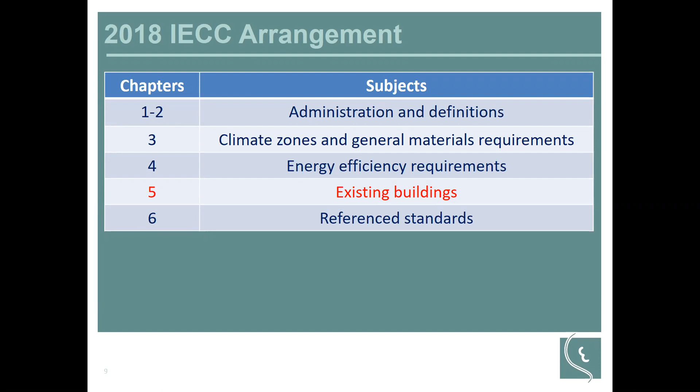Well, thank you, Robert. As Robert said, today we're predominantly going to cover Chapter 5 of the IECC. Now there are several references back to predominantly Chapter 4 in Chapter 5, and a lot of that is rather than reiterating all the levels for different aspects of a building, it just refers back to the new construction section where appropriate.

So under Chapter 5, there's 6 different subparts. Predominantly what we're going to focus on is existing buildings, as well as maintenance, and some new and replacement additions and alterations. So as far as the scope of Chapter 5, here we're looking at alteration, additions, and change of occupancy of existing buildings and structures.

One question that will come up frequently is, well, is there a certain threshold where a repair becomes an alteration? There really is not any particular threshold for that, with the exception of lighting. Lighting has a specific percentage that then has to switch from this is just a repair to an actual alteration for code compliance.

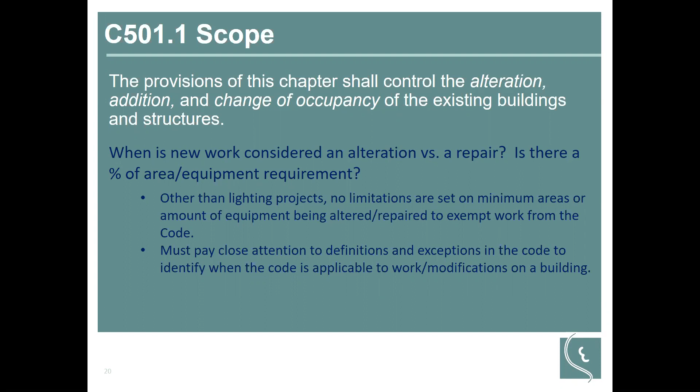So as far as existing buildings, the code is fairly nice in that it grandfathers most things in, and so it doesn't require alteration and changing of existing buildings, as long as they are not being altered, changed, or added onto. So you can continue to use the existing buildings as they are, without having to bring them up to the current IECC standards.

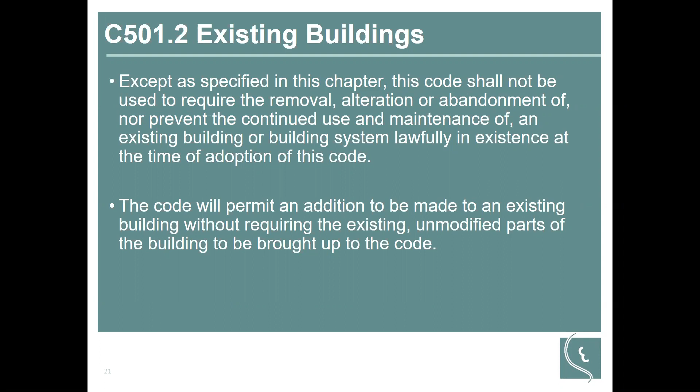This is particularly useful where it notes the code permitting additions and alterations without requiring the existing unmodified parts to be brought up to the code. So one good example of this is if you're doing roof replacement, that doesn't require you to touch and modify the HVAC equipment that may be on that roof in order to bring the roof up to code compliance.

As far as new and replacement materials, obviously the code encourages current building practices and materials to be used. They do also note that where you have restoration going on, you're likely to run into materials that may be hazardous, such as asbestos and lead paint, and these cannot be used because they can create hazards to life, health, and property. So that's very important.

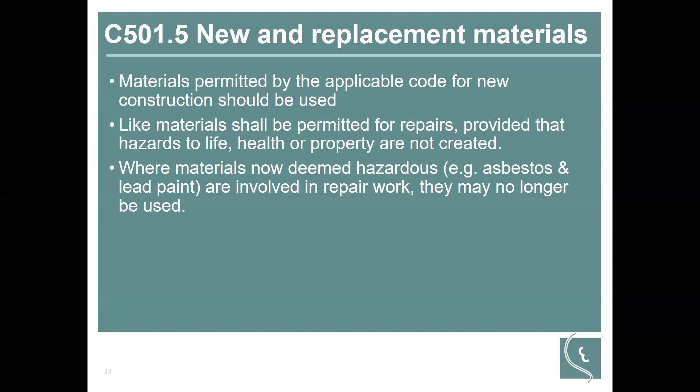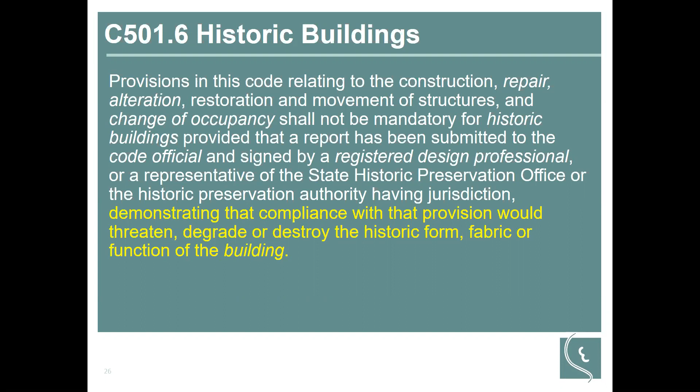So have Robert talk a little bit more here regarding additions to buildings. Thank you, Ryan.

So let's talk about the definition right out of the code first for addition. It's an extension or increase in the conditioned space, floor area, number of stories, or height of a building or structure. So I think the key words are conditioned space, increase in conditioned space.

So as Ryan mentioned earlier, additions to an existing building system or portion thereof shall conform to the code as it relates to new construction. So basically it's anything you would do for a new building without requiring the unaltered portion of the existing building or building system to comply. So that just reinforces what Ryan was just talking about.

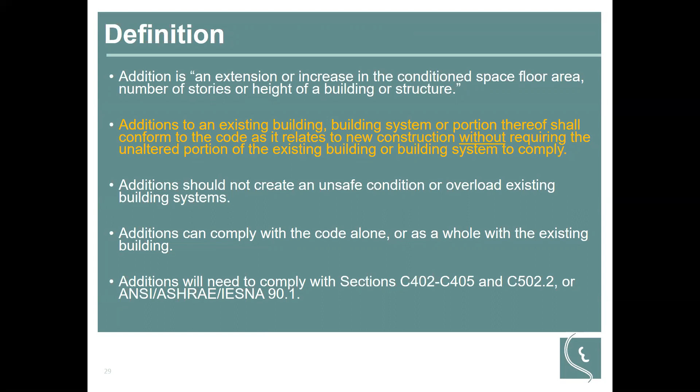So section C502, additions - any non-conditioned space that is altered to become conditioned space shall be required to be brought into full compliance with the code. Here you can see it looks like the interior of a warehouse.

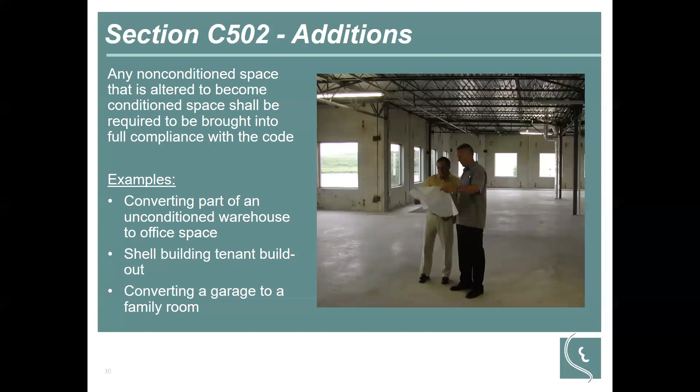It's being modified or finished out. So examples: converting part of an unconditioned warehouse to office space, which is not unusual, or shell building tenant build-outs, that's very common, or converting a garage to a family room. Those would all be considered additions because you're increasing the conditioned space.

So when we're talking about vertical fenestration and additions, C502.2.1 - basically I'm reviewing what you have to do if you're designing a new building. For vertical fenestration areas less than 30% of gross above grade wall area, you have to comply with the 3 bullet points below that.

Section C402.1.5, which is a component performance alternative. The next one, 402.4.3, which is prescriptive, the maximum U factor and solar heat gain coefficient specified in table C402.4, or the total building performance, section C407. So there's 3 different compliance paths.

If you have greater than 30% of gross above grade wall area, you've got to comply with C402.4.1.1, increased vertical fenestration with daylight response controls - meaning you've got so much daylight probably coming in that code's going to require you to put daylight response controls so that your lighting can respond to all the daylight coming in through your windows.

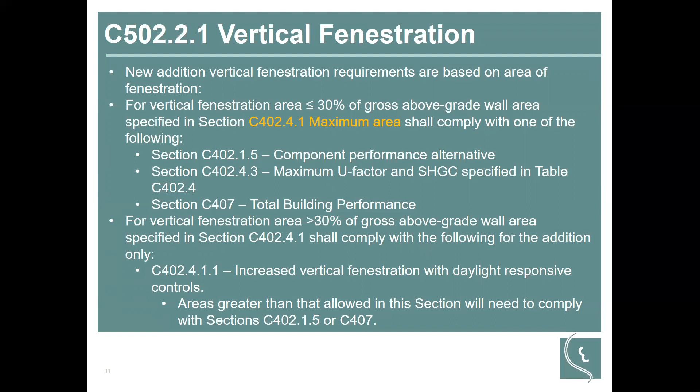Skylight areas, the maximum amount of area - C402.4.1 prescribes for both fenestration and skylights how much surface area you can have, and maximum area of skylights shall be no greater than 3% of the gross roof area.

And you have to comply with the component performance alternative or the total building performance paths. If you are going beyond the 3%, you have to comply with C402.4.1.2, which requires you to install daylight responsive controls - basically the same thing as if you're going with fenestration over 30%.

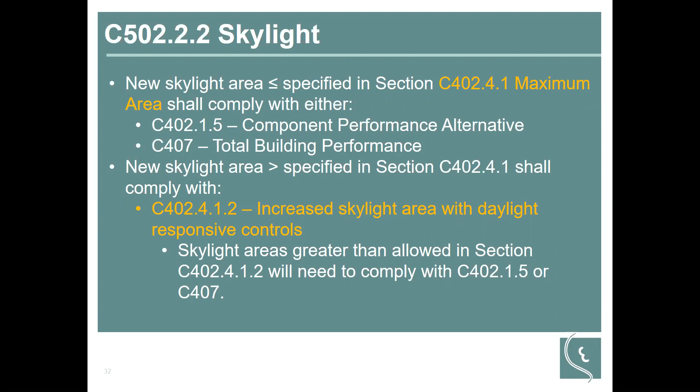So, mechanical systems and additions. They must comply with section 403, building mechanical systems, and includes all the subsections in C403 too, which basically refer you back to the International Mechanical Code, the IMC, or the IRC if it's residential, International Residential Code, as applicable.

Now, for residential additions with extended ductwork from an existing system, extensions do not need to be tested in accordance with section R403.3.3 per Illinois amendments. So the Illinois amendments on residences have preempted the IECC, but they must be sealed per section R403.3.2.

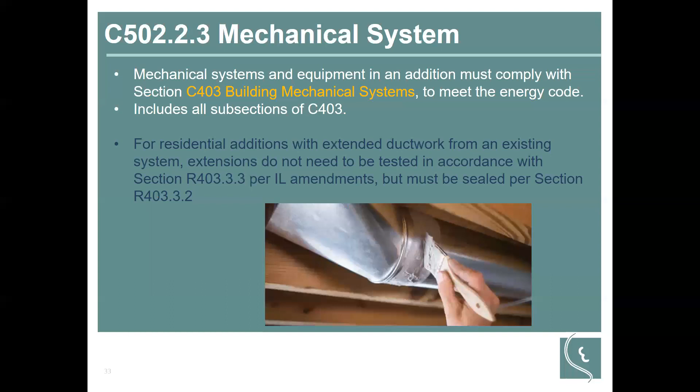Ductwork needs to be securely fastened and sealed with welds, gaskets, mastic plus embedded fabric systems, liquid sealants, or tapes, but not your duct tape that you pick up at Home Depot or someplace, which we've seen a lot of. The duct tape tends to dry out and lose its sealing capabilities. There are special tapes, and they are very sticky, so you have to be cognizant of what type of tape you're using if you're using a tape. Most of the stuff that we see in the field are, as you see in the picture there, paint-on type sealants that remain flexible.

So, in your new addition, if you have any type of water heating system, it's addressed by C502.2.4. It must comply with C404, service water heating, to meet the energy code, and this includes all subsections of that area, including the performance, efficiency, heat traps, insulation of piping, maximum piping length, and so on.

The heat traps, I was looking those up, just a little tangent here. You can see the picture on the right side there. The right water heater has got a heat trap up at the top, that little trap that looks like what you see in a waste system. And the left one does not have one. What happens is that warm water, being less dense, has this tendency to want to travel up the pipe and displace some of the cool water that then falls down into the water heater. So it creates this sort of convective loop, and that convective loop is lessened, or really terminated, if you have that trap at the top there.

What are the magnitude of these losses? I don't know, and I haven't seen any numbers on it, but it is required by code. I wonder how much difference it makes if you're using PEX tubing. I don't know, but anyway, the heat trap is in the code.

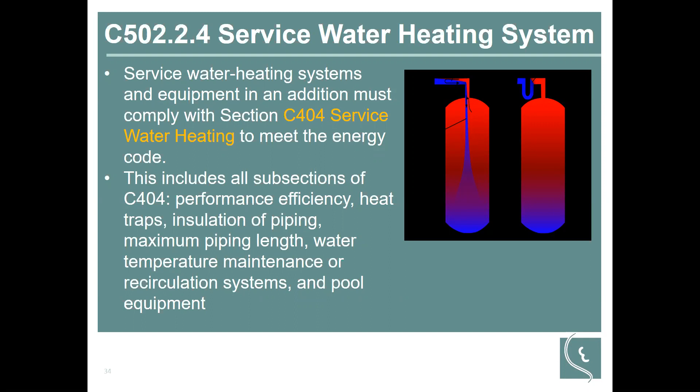So pools and in-ground permanently installed spas. If you're a hotel, say, and putting in a new pool on the outside, all the water heating systems and equipment in the addition must comply with section C404.9, energy consumption of pools and permanent spas. Everything in that section is mandatory.

It addresses heaters, time switches, and covers. The heaters have to have an on-off switch within 3 feet of the heater. Gas-fired heaters shall not be equipped with a continuous burning ignition pilot. Timers, time switches, or automated controls to turn off and on heaters and pump motors to a preset schedule should be installed, with the exception of public health standards requiring 24/7 operation, or pumps that operate with waste heat recovery pool heating systems.

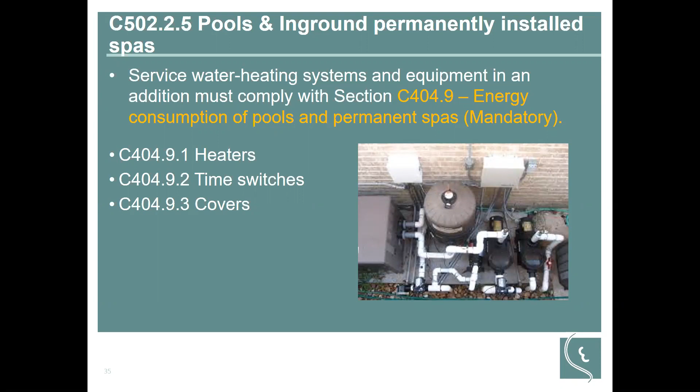Covers: outdoor heated pools and permanent spas shall be provided a vapor retardant cover or other approved vapor retardant means, with the exception that if you have greater than 70% of your heat from on-site recovery systems, then you wouldn't be required to have a cover.

C502.2.6, lighting power and systems. Interior lighting, either the addition alone or as a whole in the existing building, should comply with C405.3.2, interior lighting power allowance, and those tables. C405.3.2 is the lighting power for the building area method, and the other table, 405.3.2 table 2, is your space by space method. So basically your lighting power densities.

Exterior lighting, for either the addition or the whole building, should comply with C405.4.2 and the exterior lighting power allowance. And once again, it just references the two tables that have your lighting power densities, basically.

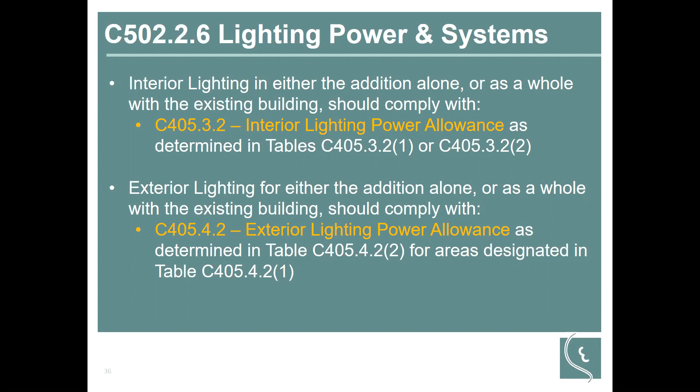Lighting power and systems. The Illinois amendments specify lighting efficacy for no less than 90% of lamps to be 65 lumens per watt or greater, and fixtures at 55 lumens per watt or greater. This applies to the residential addition alone. So on a residence basis, the allowable low efficacy fixtures and lamps may differ depending on the other fixtures in the residence.

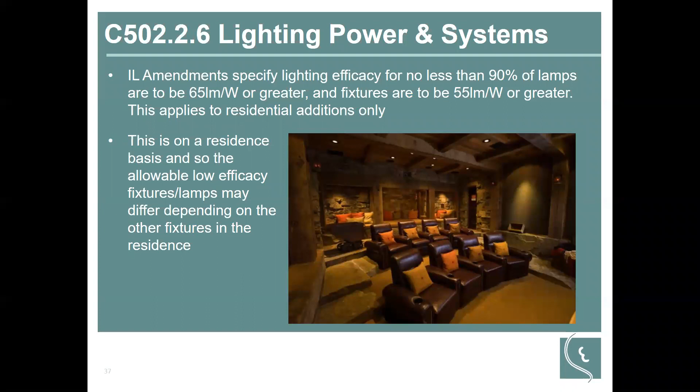So basically, it's reinforcing what Ryan said earlier. Additions must comply with codes, everything from the insulation levels, fenestration, U values, solar heat gain coefficients, electrical, NEC requirements, but the existing structure does not need to be upgraded.

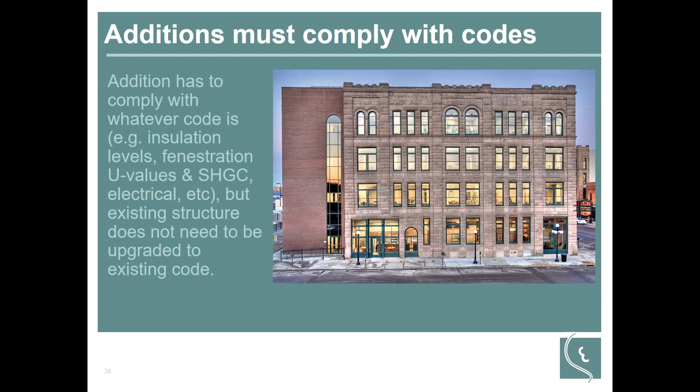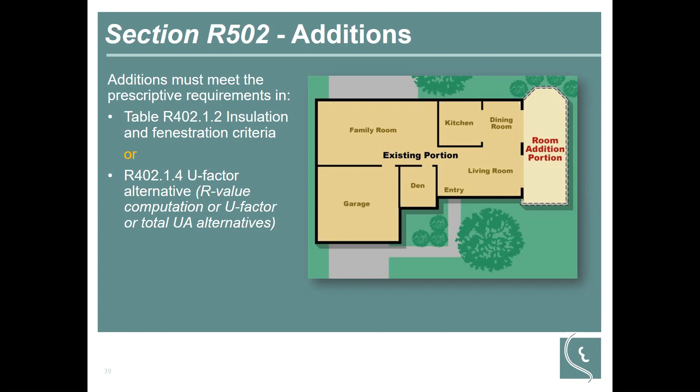Looking at residential additions, we've got, just quickly, table R402.1.2, insulation and fenestration criteria. So the addition must be that or R402.1.4, which is the U-factor alternative. So two different compliance paths for the room addition on your residence.

And additions comply if any of the following is demonstrated. The addition alone complies with the provisions of this code. The existing building and addition together comply as a single building, or the existing building and addition together use no more energy than the existing building. That would be using your performance path where you're doing modeling. The other two would be more prescriptive.

So that takes care of additions pretty much, and I am going to turn things back over to Mr. Siegel.

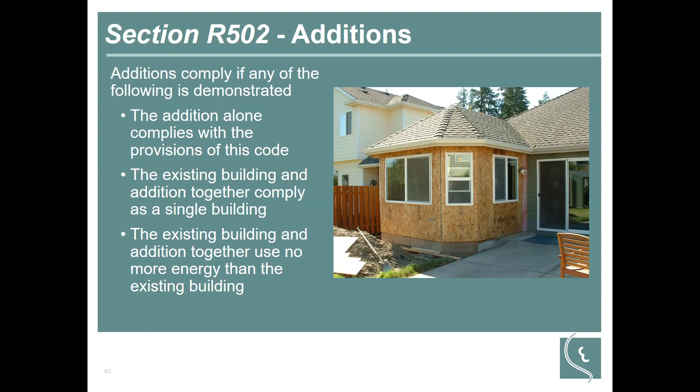Well, thank you. Next up, from additions, now we get into alterations. This is probably where the majority of the work and compliance ends up lying, because buildings will likely go through many alterations over their life, whereas they may or may not have additions.

So as far as alterations, as I talked about earlier, anytime you're doing additions or alterations, the code requires that the manipulated parts of the building need to be brought in compliance with the code. Earlier, the example was, if I'm doing a roof, the code doesn't require me to pull the HVAC equipment in order to work on that roof.

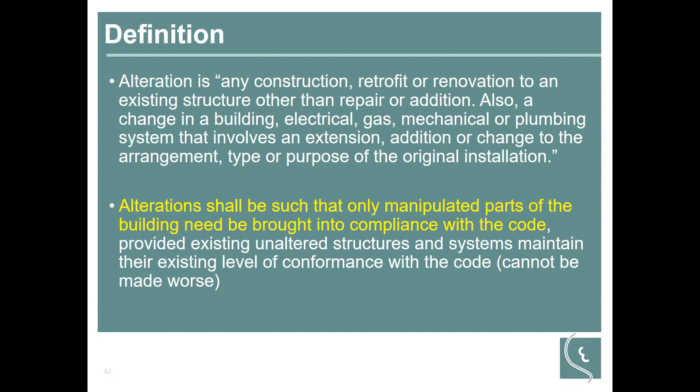And so here noting that the unaltered structures or systems can remain with their existing level of conformance of the code. So you cannot do anything to impair the performance of the existing equipment to make the energy performance of the equipment worse.

So, as far as alterations, the code does call out several exceptions where the code does not require things to be brought in full compliance. Several of these are just modifications to existing portions. Storm windows, obviously your window is being kept in place, so this is just providing some additional protection and likely some additional performance benefits to the existing windows.

Surface applied window films. Number 3 here, noting existing ceiling, wall, or floor cavities exposed during construction, provided that these cavities are filled with insulation. This one phrase here is actually a pretty heavy phrase. An example of this would be if you remove the drywall on an exterior wall, you've now exposed the wall cavity.

The code does not require you to bring that wall into full compliance. An example would be cavity insulation of R20 in our regions here. That won't fit in a typical 2x4 wall. The code does not require you to fur the wall out in order to put the full R20 into the wall. It only requires that you fill that cavity with insulation.

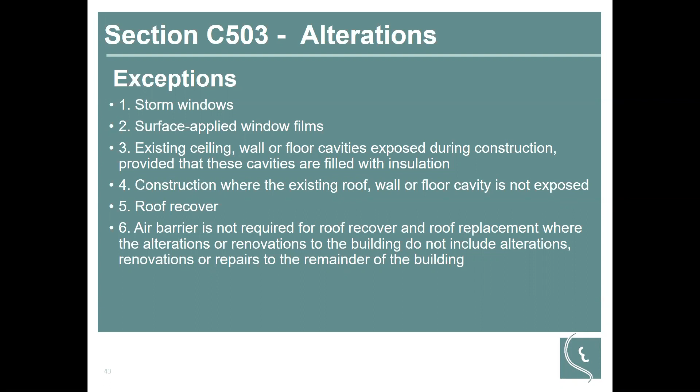So, Robert touched a little bit earlier on changes in space conditioning, and he had noted about low energy spaces being brought into condition. You do have to bring those into compliance with the code. Now the code does provide a couple of exceptions where, as long as you're within 10%, either using the total UA or energy performance or energy costs, the code acknowledges that is sufficient without requiring full code compliance.

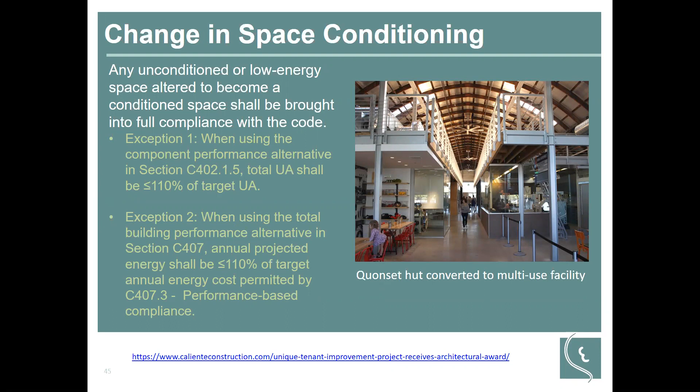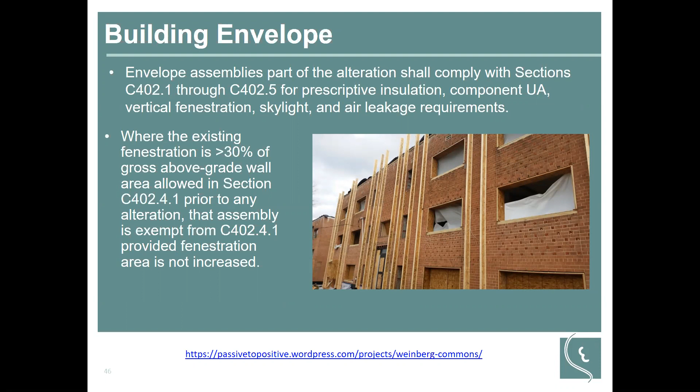As far as the building envelope, if you're doing modifications to the building envelope, it's calling out that you do have to comply with it. However, if you have fenestration levels exceeding the 30% for windows or exceeding the 3% for skylights, the code does allow you to maintain the same surface area. However, the U factors and solar heat gain coefficients of the new fenestration must match the code required levels. So it allows you to maintain an existing opening condition that would not have necessarily been in compliance otherwise.

C402.1.5 is a components performance method. This could be if you have a multi-component roof. So you may have a roof where you have insulation, and then you may use insulated panels or insulated roofing panels over top of it. So you may have multiple types of insulation, and so you can use the components performance method or the total building performance method for compliance.

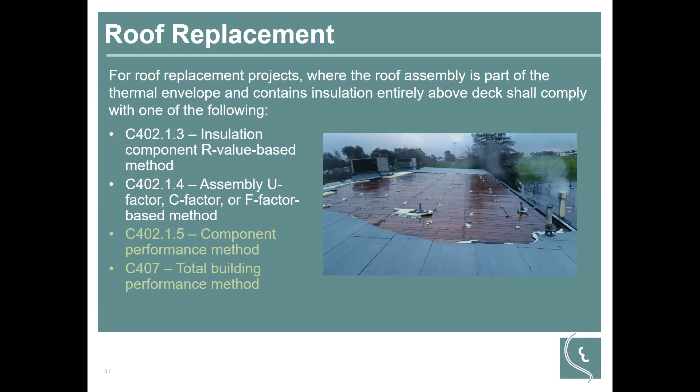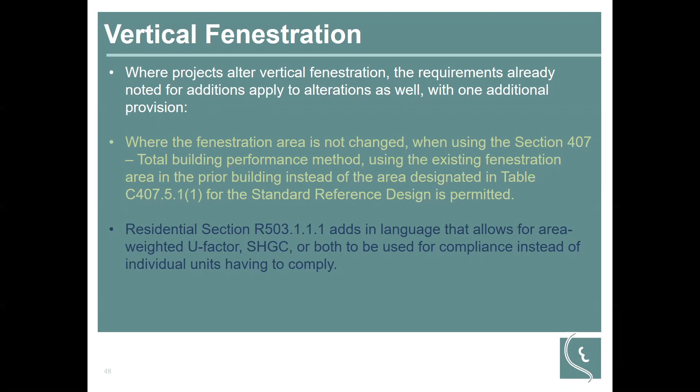As far as the reference design, normally when you use building performance methods, table C407.5.1 specifies the reference design that you must use as your basis of what you're comparing the new building against. And some of those provisions are that maximum of 30 or 3% for vertical fenestration or skylighting. This allows you to use the existing envelope as your reference design rather than the baseline of only 30%, or 3% in the case of skylights.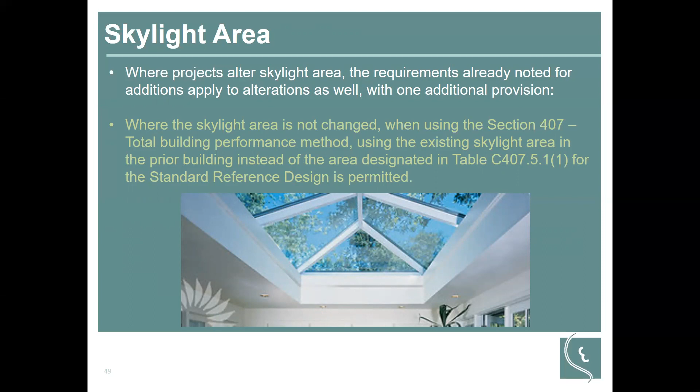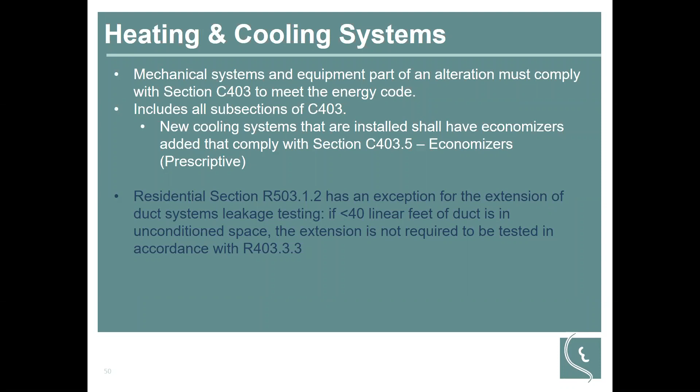So as far as heating and cooling systems, whatever you are altering, you have to bring those up to the current standards. That includes things such as economizers. And so for residential, we had noted earlier that there's an exception for duct leakage testing. Here in the IECC, as long as the duct is less than 40 feet, then you don't have to do testing. Illinois has amended that to any length. However, it must be sealed.

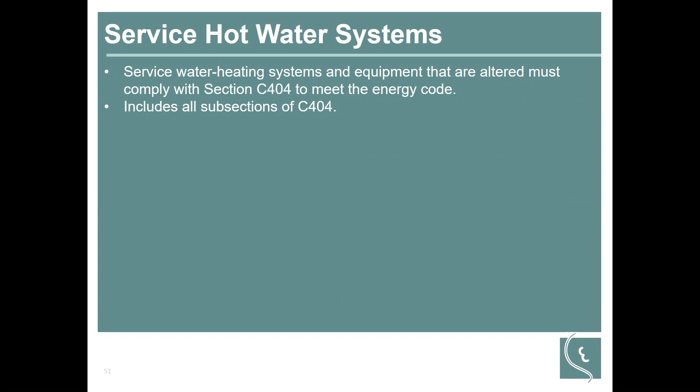Service water heating, again, if you're doing alterations, the same thing as an addition applies. If you're altering your hot water system, you need to bring it up to the current standards.

As far as lighting, this is one area where the code definitely does call out differences between alterations and repairs. So alterations in commercial are classified as alterations that replace 10% or more of the luminaires. And in residential, it's considered an alteration if you are replacing at least 50% of the luminaires in a space, and in this case, a space being a single room.

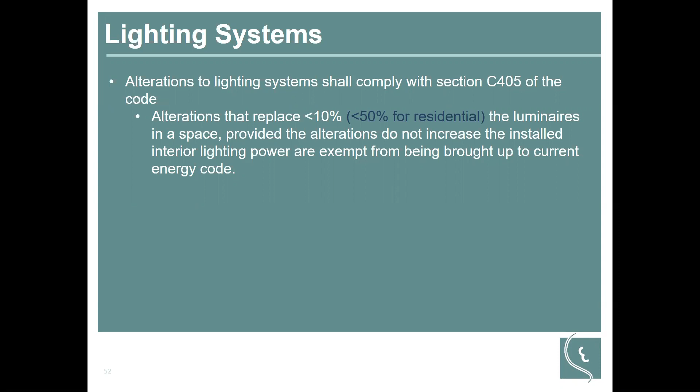So if you are below those thresholds of 10 or 50%, that's considered a repair, and so you don't have to bring it up to the full current standard as long as the lighting power is not being increased. If you go over 10 or 50%, depending on the location, that's when you get into lighting power densities, lighting controls, etc. And on residential, something different, sorry.

So as far as a repair, here's the code's definition of what a repair is, and they call out a few that are specifically defined as repairs. Replacing the glass in an existing sash and frame, that's considered a repair. Roof repair is also a repair. Existing doors: if you replace the door, while the door needs to comply, it doesn't require the installation of vestibules, assuming that an existing vestibule was not removed as part of it.

And for repairs where only the bulb, ballast, or both within the existing luminaires are replaced. This would be something to be aware of, particularly if you're doing LED replacements: if you are upgrading a fixture from fluorescent to LED, as long as the original fixture is remaining, that is considered a repair. If you replace the fixture, then you may get into a situation where you're into an alteration. So that's something to be aware of.

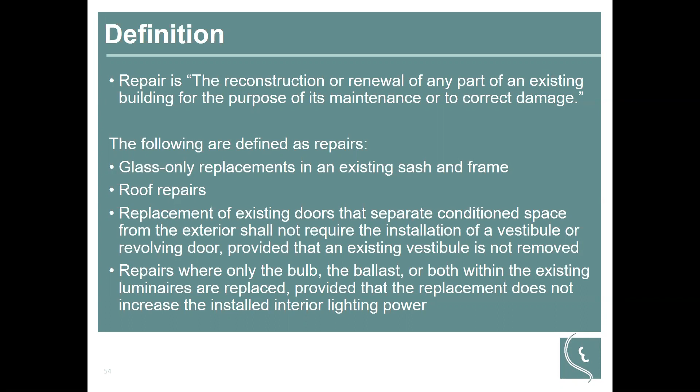So as far as changes of use or occupancy, the code calls out changes of occupancy as either a change in occupancy classification, so that could be going from a group M to a group R or other associated groups. This could also be a change from one group to another within an occupancy classification. You might be in a group R3 single family home, and change to a different classification within the group that might be considered multifamily. If you convert from single family to multifamily, that's a change in occupancy, and it would require bringing the entire building into current code compliance.

So here, in general, what they're looking at to help determine this is anytime you're changing occupancy that would increase the demand for fossil fuels or electricity. So if I'm going to convert a warehouse into a manufacturing facility, that would definitely increase the demand for fossil fuels or electricity, and so would trigger code update and compliance for that.

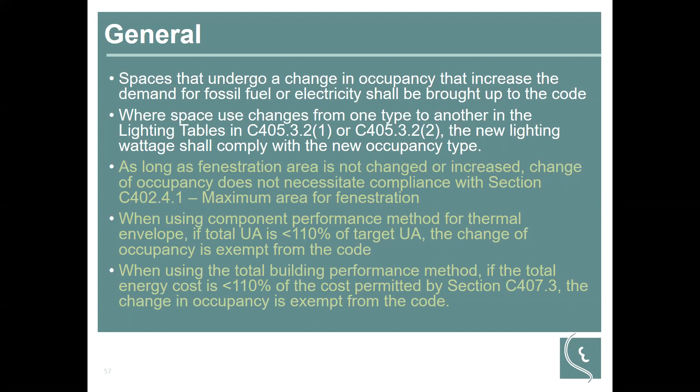Also, if you're changing from one type to another in your lighting tables. This is one benefit of using the building area method as opposed to the space by space method, as those are much larger and broader groups. And again, here you see that 110% coming into play if you're using component performance or total building performance methods to show current code compliance. The green text here is new to the 2018 IECC. The white was previously found in the 2015.